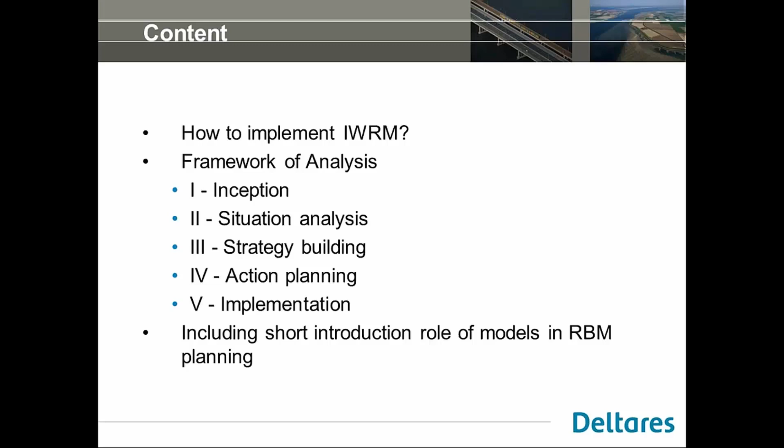To recapture IWRM, what is it? It's a big word. It was already established in 2000 by the Global Water Partnership, and IWRM is a process. It's not a goal, it's a process that stimulates or promotes coordinated development and management of water, land, and related resources in an integrated way, and it should benefit economic and social welfare and promote sustainability of ecosystems. It's also based on 4 principles, which we call the Dublin principles because they were discussed in Dublin. One of the principles, for example, is a participatory approach, so there is definitely a place for stakeholders to be involved. They should be involved to make a good IWRM plan.

But how do you implement IWRM? There was a report from the Global Water Partnership in 2009. It gives you a kind of handbook for implementing IWRM in basins, because river basins seem to be the most appropriate spatial level to implement IWRM.

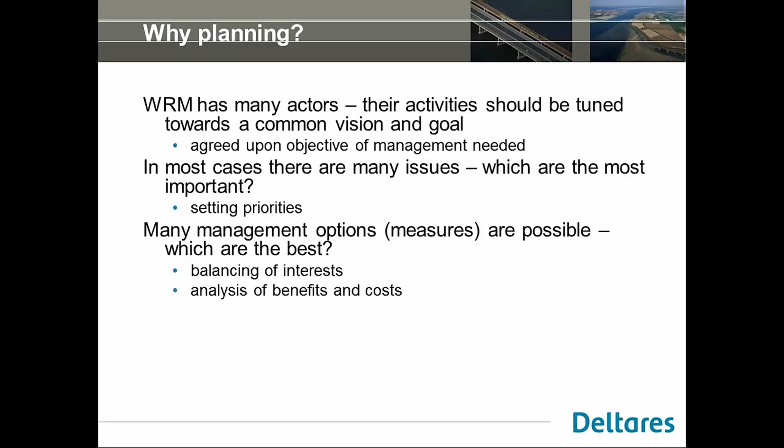And if we want to have an effective plan, we also have to make sure what has to be done and who will be responsible. Who will take up the action? Who will take care? Who should give a permit? Who has to do the actual implementation in the field work, and so on. So we have to be clear about roles and responsibilities.

And we want to assess the risks that are involved with this plan, so we also have to make a risk assessment. And so all these items make that we want to plan ahead, so we want to come up with an IWRM plan.

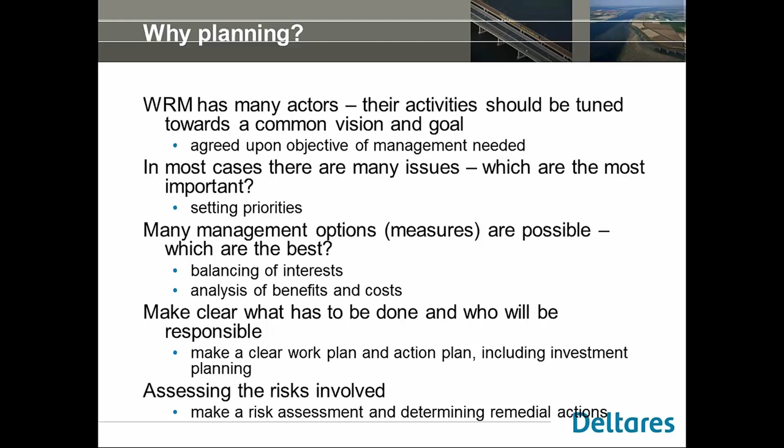A typical planning cycle that was already presented by the Global Water Partnership looks like this. Most of it starts with a vision: where do we want to go ahead? We identify the problem, what is going on now, what is the situation now, and how are we going to improve it, like a strategy. We make a plan, we implement it, we evaluate it. Are we proceeding? Is it going to be better according to our vision, where we want to go? And we go ahead.

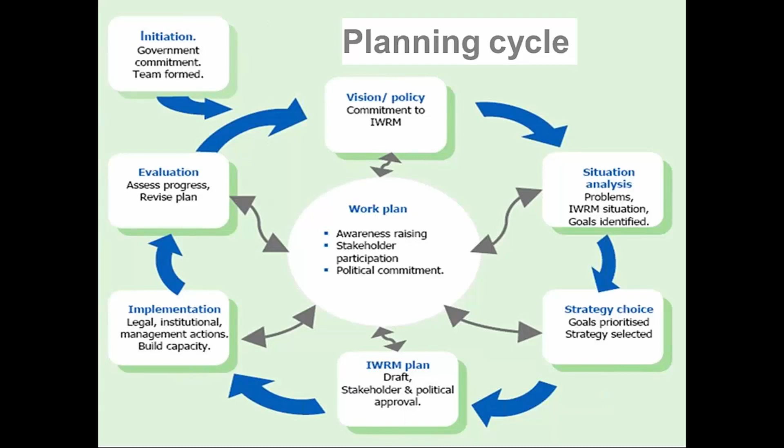What we did in the project for the World Bank, Deltares, Global Water Partnership and IHE, is we made a framework or planning guidelines for the Philippines, on how to implement IWRM in the Philippines on the river basin level. We made a manual showing all the steps to go through to come up with an effective IWRM plan.

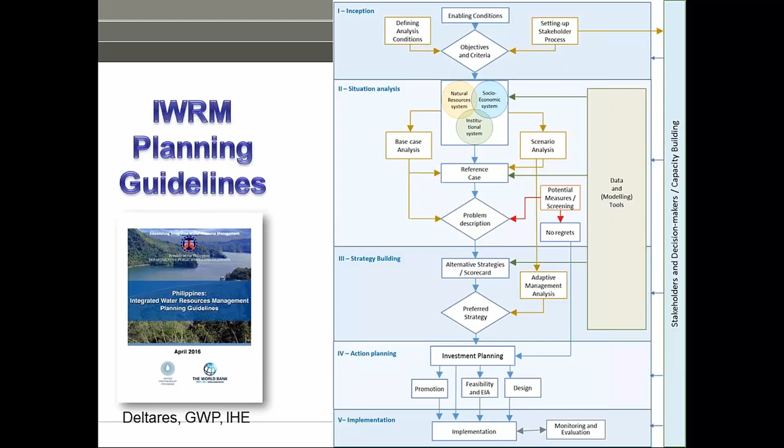The framework looks like this, and today I will guide you through this framework. It consists of 5 main phases. The first phase is the inception phase. It's the starting up of the project, and it sets the boundary conditions for the analysis.

The second phase is the situation analysis: what is happening now, and what is happening in the future if we don't do anything. The next phase is strategy building: what measures can we take to address and improve the situation in the water resources management system? The last 2 phases are the action planning and implementation, where we prepare the investments and start implementing these measures.

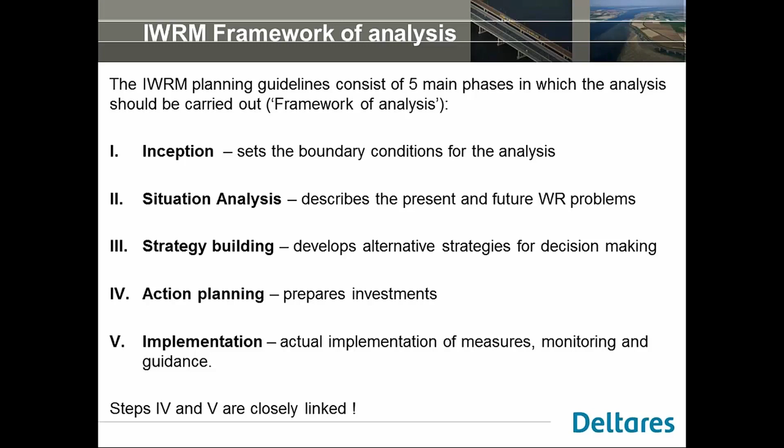It's not that if we just do these 5 phases, then we are done. No, you have to realize that it's an iterative process, a cycling process. So after you finish your IWRM plan, a next phase will start and you can focus more on a special area or a special problem, or get other people involved, and so on.

It's a cycle process, and every time you proceed more. For example, in the Netherlands, we have this Dutch Delta program. We had the first phase, it took 5 years, and now we are in the second phase that again takes 5 years. And we start all over again, but now we are focusing more on hotspot areas in the Netherlands.

It is important also to get the stakeholders involved and to end every stage of the project, of every phase, with a decision making or agreement upon between the stakeholders. So every phase, the stakeholders in the beginning of that phase, we start creating common level of knowledge so everybody knows what's going on and has the same information. Some stakeholders have a lot of information about their own situation, but not from the other stakeholders.

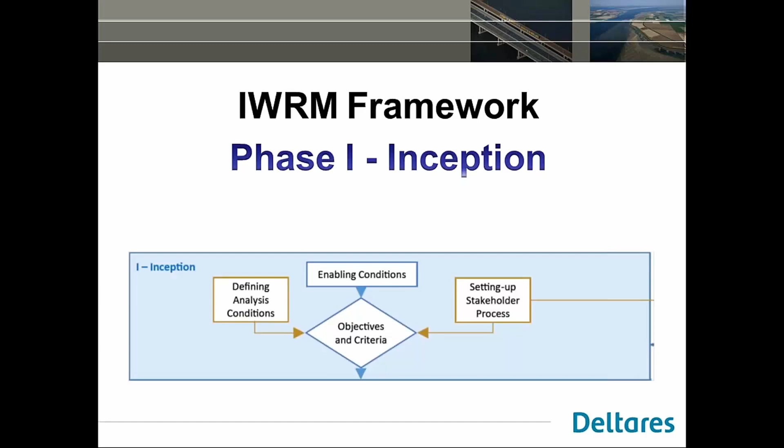So when I'm thinking about creating enabling conditions, step 1 is what I said - it should be embedded in the institutional framework of the country or the river basin. And you have to have management instruments like data and tools to make this plan.

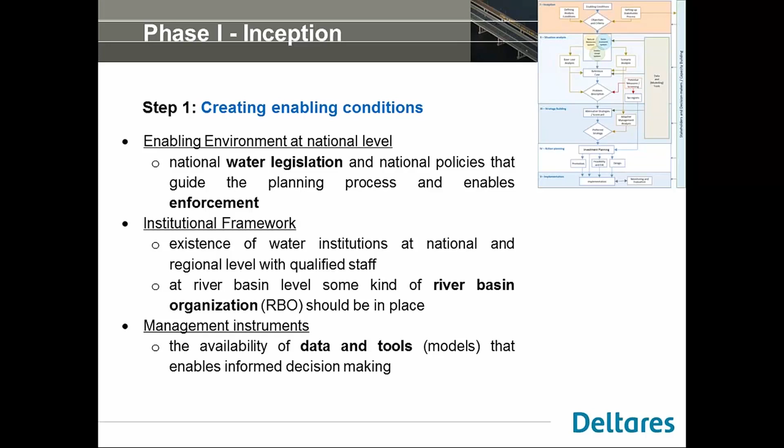The stakeholder process is also important. So who should be involved? So it starts with stakeholder analysis. What are the representatives? Which are the governmental organizations that are involved? Are the NGOs involved? Who are the stakeholders? Is the private sector, and in what way do we want to involve them?

Should they be involved like by presentations? Or are we going to discuss and build up the models? Or are we going to outsource research? Or is it just discussing? There are different ways to involve these people.

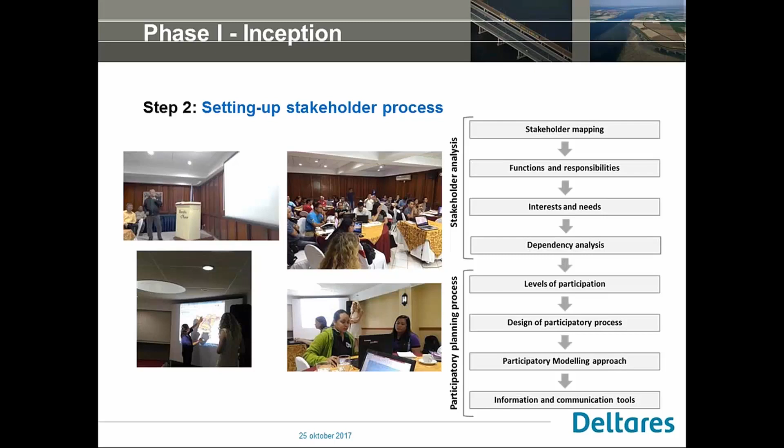And we have to be clear about what are we going to look at. Is the planning ahead for 5 years? Is it for 20 years or 50 years? In the Netherlands, for example, we look at 2050, 2100 - that's far ahead. But you can imagine, for example, in Bangladesh or in the Philippines, it's no use to look ahead for 2100 if you're studying climate change, for example, it is. But nowadays, there are already big issues, so you plan ahead for more like 20 years or so, because there's also major change going on in the countries.

And you also have to be clear about economic analysis. You have to be clear about certain assumptions like discount rate and so on. So you have to specify these. And you also have to be really clear about system boundaries.

Are we going to take the coastal zone also into consideration, or do we only focus on the river basin? Are we going to the neighboring country, like for example for the Ganges? Are we also taking into account Bangladesh and India, or only Bangladesh? So we have to worry about this, and how are we going to present our results?

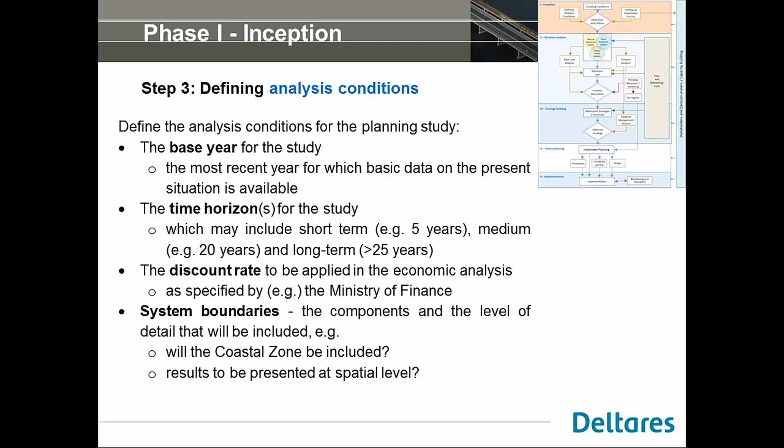One of the most important steps in this inception phase is also defining your objectives. So what are you going to reach for? And normally it's based on national objectives. So what is the national policy? And it's not only related to water resources management, it also interacts with other policies in the country. But how to judge them, we have to make them operational in water management terms.

So what can we do from a water management point of view to address these topics in the country? And when are we satisfied? So what are we targeting for? And how can we monitor that we reach these targets?

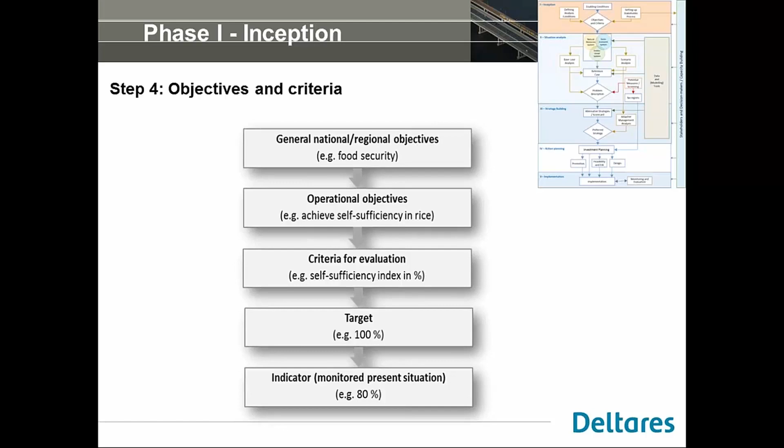And in the end, we want to come up with a scorecard. So when will we think it's perfect? That's in the right column. And how far are we now, and how far after? If we don't do anything, what will happen then? How are we going to accomplish this?

For example, in the Sustainable Development Goals, we say, okay, we want to implement IWRM. It's now between 0 and 100% as the target, but when do we reach the 100%, and how are we going to target that we now, for example, reach 80% or so?

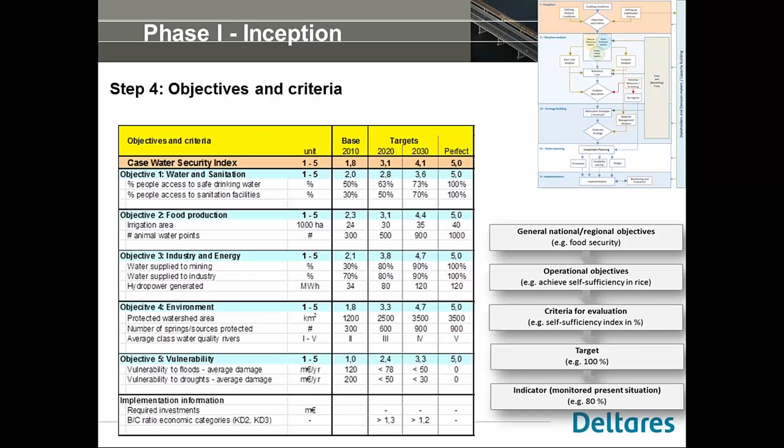For an example about these objectives, the objective of the Netherlands - I showed you a picture about flooding in the Netherlands - and for the Netherlands, the primary objective, most important, is safety. So if we get flooded, then the Netherlands has a big problem. So it's more important than fresh water supply, for example. We think our water system is mainly designed for managing this flooding issue.

Secondary, so it's also important but less important when we make decisions and set priorities, is drinking water supply and also supply for agricultural use or navigation. But we also think it should be fitted into an ecological system. So it's quite expensive. We have, for example, this project, Room for the River, that we want to implement, and we want to safeguard the country from flooding, but we also want to take into account the ecological consequences.

So we give priority to measures that also benefit that goal. And it's different for each water resources IWRM planning study, but if you look at the different goals in different countries, you see some similarities.

And mainly IWRM is really focusing on developing water resources in a way that we get maximum benefits from it, both in a social way and in an economic way. So it's not only about the water system itself, but it should in the end benefit equity, income, and so on, and also the environmental conditions. But it's also limited, of course, by the budget that we have. So we can only spend it once, so we also have to take that into account.

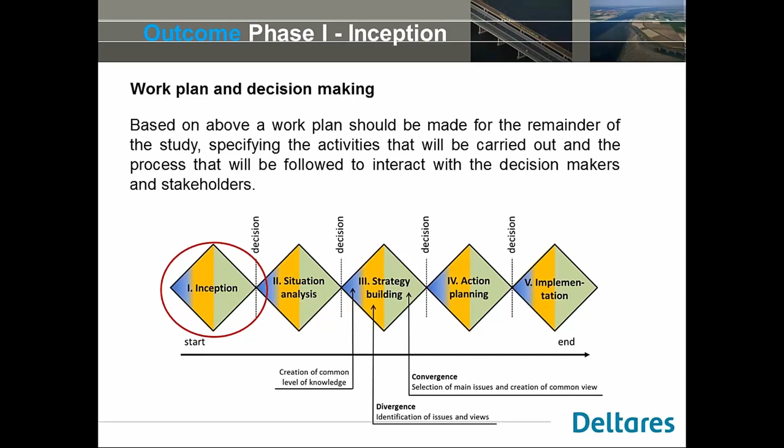Then at the end of the first phase, we have a view about what the IWRM plan should be about and what we want to accomplish. So based on this, we can make a work plan, how to proceed and do the next 4 steps. Okay, then I will go quickly through the 4 steps. The first step is the situation analysis.

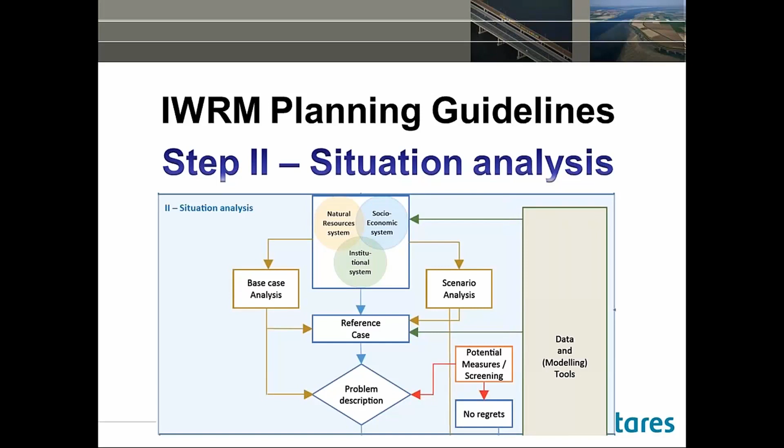We describe the water resources system. For integrated water resource management, it's important to have the natural system, so the water system and the land resources, but don't forget about the socio-economic system. So what are the sectors that need water, the water demand, and also the guidance, the regulations and the management, so the institutional system.

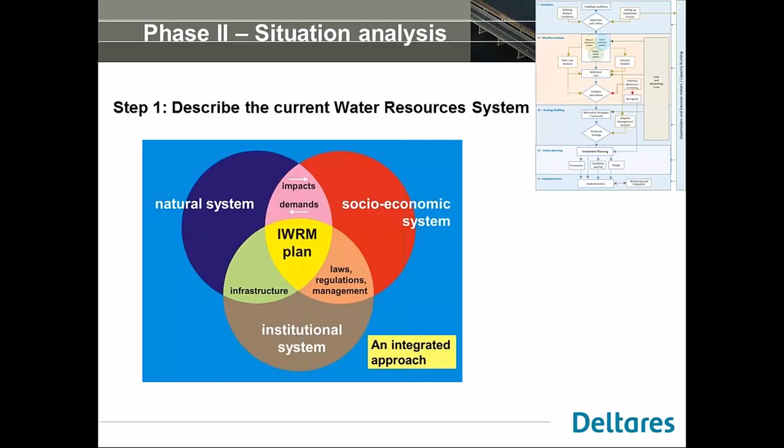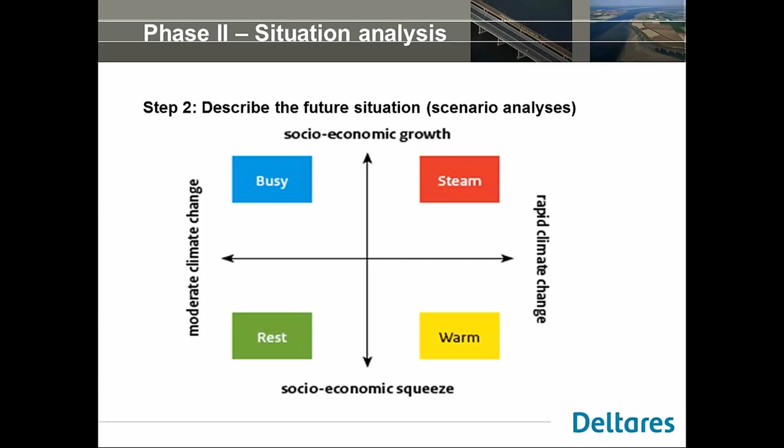We want to describe that in an integrated approach. And we don't want to show it only for the current situation, but also for the future situation. So we have to develop scenarios looking at climate change and also on economic developments.

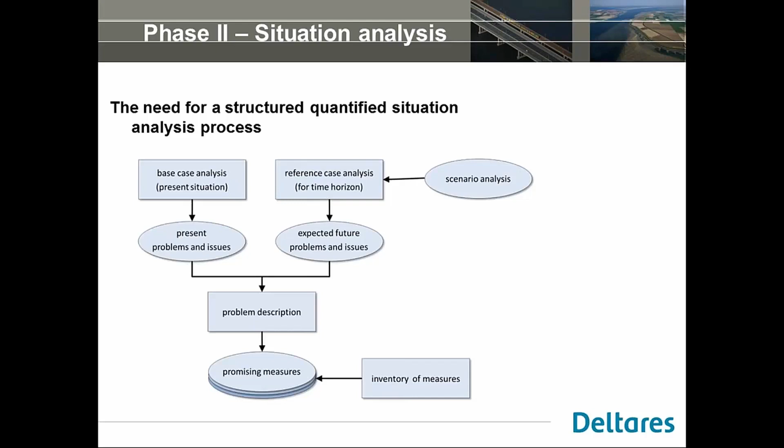So by comparing the base case, the present situation, and the future situation, we can make a description of the problem. And by making a description of the problem, we can make an inventory of measures that we can take, a long list, more or less a wish list maybe, of how we can address these.

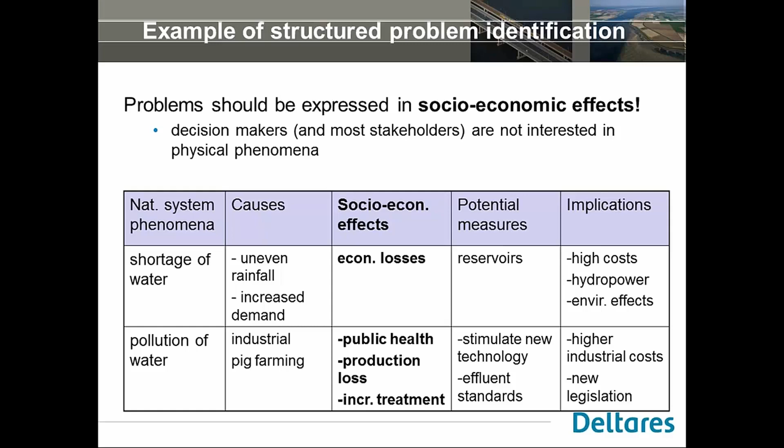We already discussed that we think the effects should be expressed in economic terms, also because decision makers are not only interested in physical phenomena, but also in economic phenomena. They want to know about food production instead of water levels, for example. So this is an example of how the problem definition can be presented.

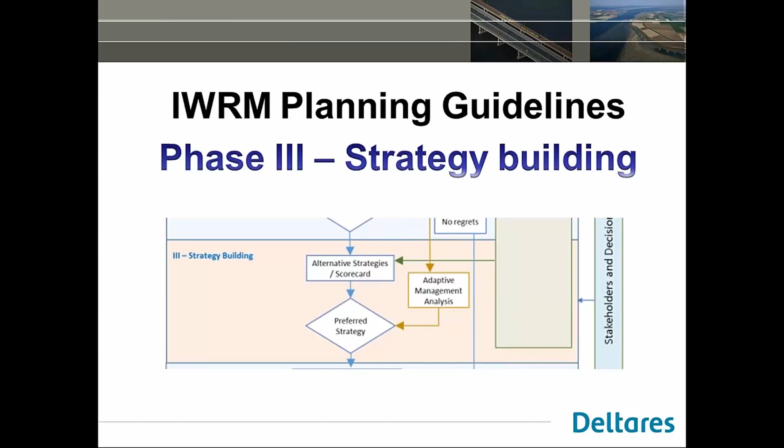And then after the situation analysis, we come up with the strategy building phase. The strategy building phase consists of 3 steps: development of alternative strategies, adaptive management analysis—so how can we adapt to the future—and then selection of the preferred strategy. This is an example of how to structure these: design different alternative strategies, judge what the impact of these strategies is, and compare them.

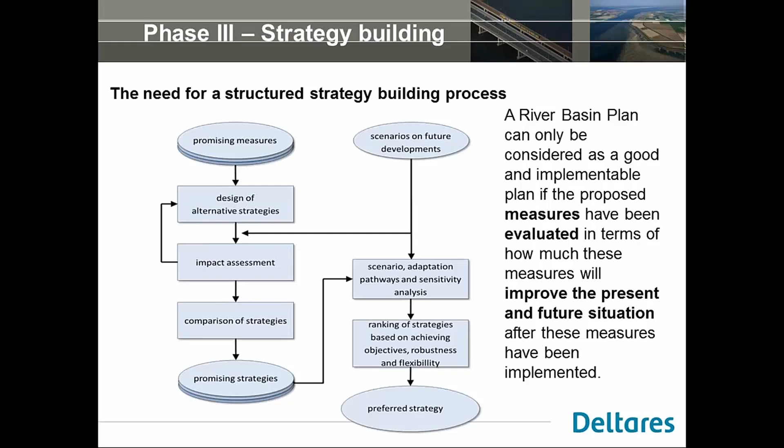For example, by comparing these alternative strategies in a scorecard, we can present it to the decision makers. It can be done in an iterative way, but also based on extensive modeling exercises. Sometimes it will be possible to express everything in cost-benefit analysis, but for example for nature it will be more difficult, and maybe it's more about a judgment for which one is the best, which one is the middle, by expert judgment.

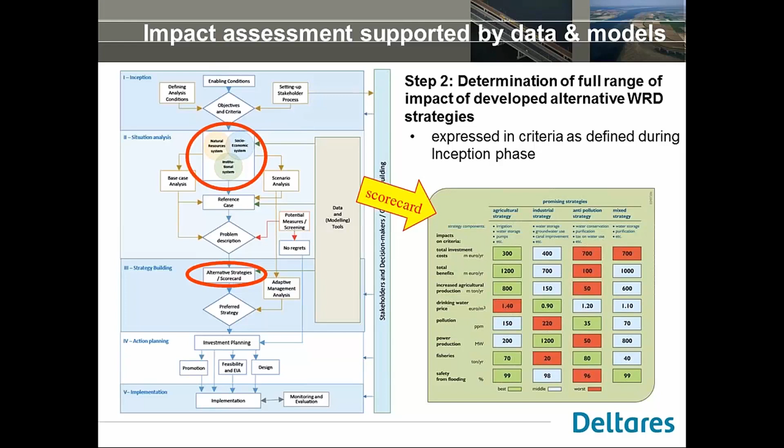This is an example of the scorecard that I presented by the problem analysis. So we now add the strategies and see what the impact is related to our target, so how are they going to improve the situation.

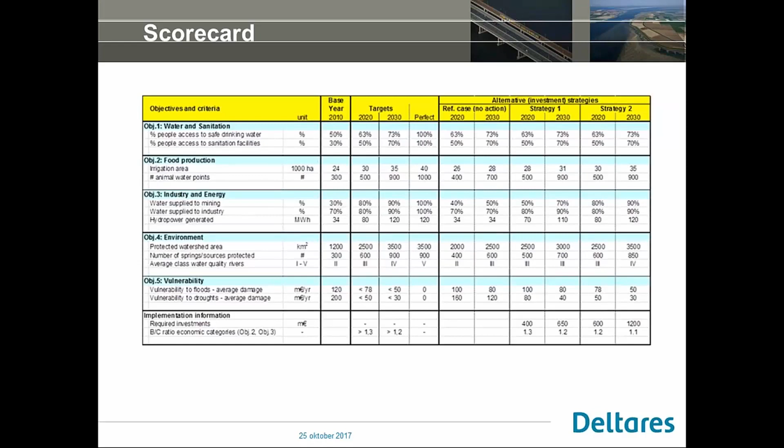And then we are at the end of the strategy building phase, and we have to select the preferred option that we are going to implement. We have to translate this preferred strategy into an action plan and come up with the implementation. One of the items in the action plan is the investment planning, and that's getting more and more attention now, as we see in the scientific world also.

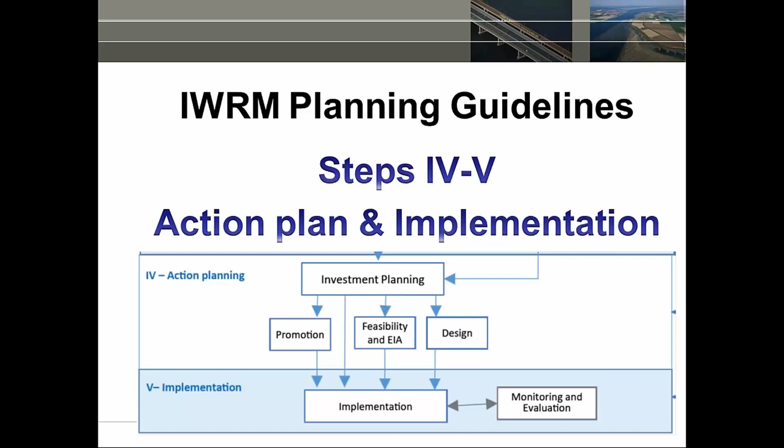It's more about financing, how to finance all these measures and take them into account as soon as possible to make really an effective plan. So that we are clear about what we are going to do, who is going to do it, how are we going to do it, when, and where is the money coming from. Otherwise we have a nice plan, but it will end up on the shelf.

Now, for the investment planning, it's important to take into consideration the governance mode. What kind of type of good is it? Is it public? Is it private? For example, if we need water for a wetland, is that private? Should it be from the private sector? Are people going to pay to visit the wetland, or can everybody go there? So is it a common good because it also protects us from safety, for example from the typhoon? So it can be also a common good.

We have to take it into account to define our level of services. So what is it going to do now? What will be the level of service, for example, for water supply? And we have to come up with the financing and the procurement strategy. So what is the financing behind that measure?

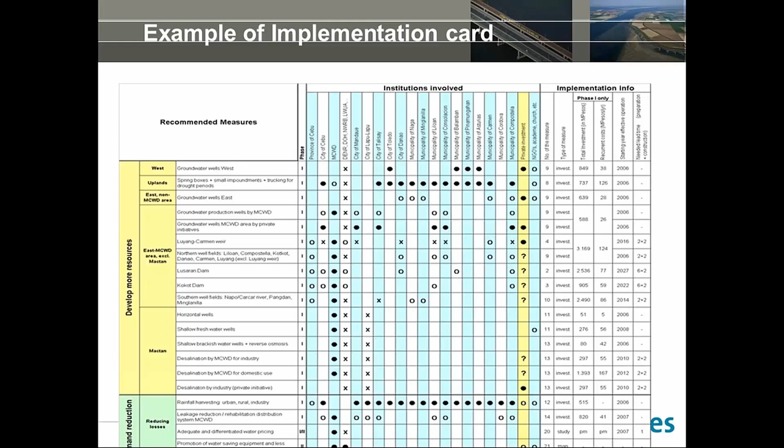Last, an example of the implementation card, to make really clear which institutions will be involved and what will be their role. This is an example of Cebu in the Philippines that we made. We spelled out which organization should take the initiative, who is providing permits, who is really implementing it. Is it an investment or public awareness? Is it green infrastructure or gray infrastructure? What will be the cost and where is it implemented? This can help to get an overview and present it to decision makers.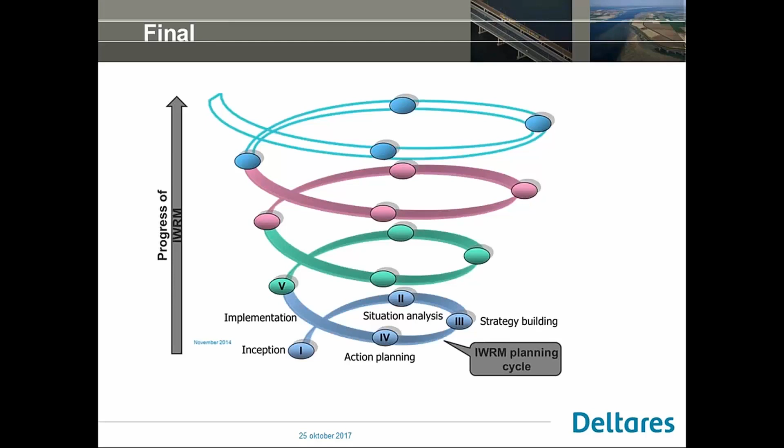In the end, the outcome of this phase is this action plan and implementation, and that should be monitored. So we also have to put it in place organizationally, for example by a technical secretariat that monitors and evaluates the progress, and if necessary steers ahead and improves the action plan, or maybe we go up again and start making a new plan or update the plan. What I want to stress here at the end is that it's a circular process, continuously improving, and it's the same - not only for the plan, but also for the framework. We have to adjust and improve it for the next step.

Then I came to the end of my presentation. So are there any questions still? Because it's already late, I understood. So, okay, one or two questions.

A lot of information. In the Netherlands, a question, or maybe abroad, for the webinar? No. Okay, then I have a question. No.

If you look at the different phases, I think there's a lot of time needed to come to all the phases. Which is the most difficult part, or the longest part? Most time consuming. And what can you do about it to speed it up?

I think what you see is the inception phase, to get agreement about what are the issues that are addressed, because in the beginning everybody is looking from their own point of view, and I think it takes time to grow together and to get real commitment to make this plan. You don't know beforehand what comes out of it and if it will benefit your own sector. So in the beginning, everybody should agree upon how to proceed, and if the steps are clear, then you can go ahead, and everybody will accept what comes out of the plan, if they are taken by hand. It shouldn't be a surprise.

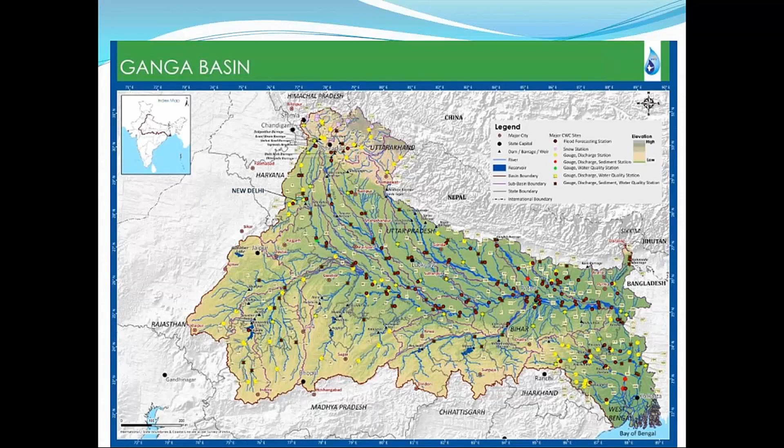This is nice, and it works. It's huge - 860,000 square kilometers. Let's compare: the Netherlands is 40,000 square kilometers, so it's about 20 times the Netherlands. There are 11 states included, so because water management is dealt with at the state level, that requires a lot of coordination. Furthermore, there are 450 million people living in the Ganga basin, and that's also a lot. I've never worked in such a huge basin as the Ganga basin.

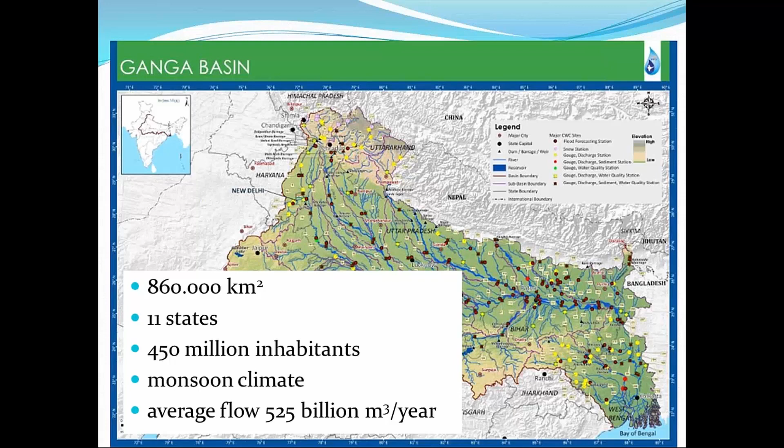The average flow is 525 billion cubic meters per year. If you compare, for the Nile that is about just a bit more than 10% of that. If you divide the average flow by the number of inhabitants, you're around 1,000 cubic meters per capita per year, which is more or less the boundary for water stress. So that's already showing that in the current situation there is already some water shortage, especially in years with El Nino induced droughts. There is already experienced shortage in the system, mostly in agriculture. But the expectation is that will increase a lot in the future due to population growth and economic growth, which results in an increase of per capita water demand.

The issues are not only on water quantity, but very much also on water quality and ecology. Because a lot of water is taken out of the system, the rivers in the dry season become nearly dry and nearly completely filled with wastewater. India has a monsoonal climate with nearly all precipitation falling in 2 months, and the rest of the year is very dry. There is not so much storage in the basin at the moment. So during the wet season, all gates are opened and the rivers are flushing. The other 9-10 months of the year, all gates are closed and there's hardly any flow in the main stem of the upper part of the Ganga.

In this eastern part, there's much more water coming in, mainly from the Himalayas. So that results in water quality problems, of course also caused by a lack of wastewater treatment capacity, but also ecological problems directly due to the water quality problems, but also related to the low flow, related to the loss of habitats for species, because the connections are lost along the river due to dams and gates, but also between the river and its floodplains.

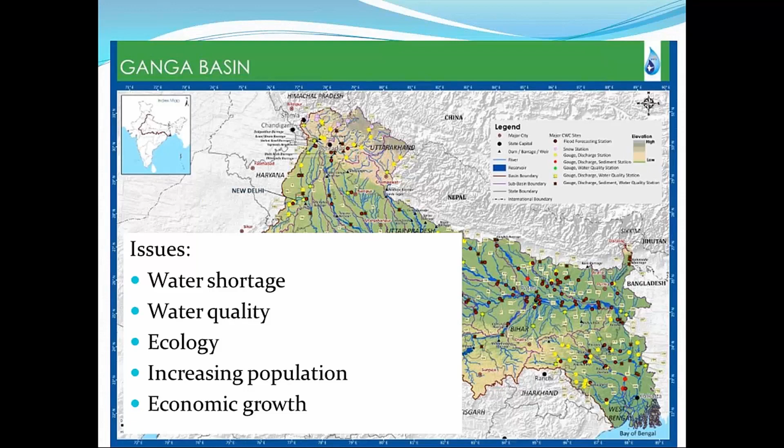The objectives of our study were fourfold, and the one we deal with today is mainly on accessible information and knowledge. That's where the computational framework is important, but it's also related to the other three. The multi-stakeholder process - we very much included that into our model building by trying to be as collaborative as possible. The final aim of the project is to define some plausible scenarios - not a plan, but some future possibilities that could form the basis for further decision making by the government of India and the different actors. And finally, to strengthen the capability of the different players to do strategic planning in the basin.

The aim of the model, the computational framework within this whole setting, is to support decision making with respect to strategic basin planning. For this huge basin, it's impossible to make one model which includes all details. So for strategic basin planning, strategic decisions, it has to be able to describe the impact of measures at basin level, but not detailed at local level.

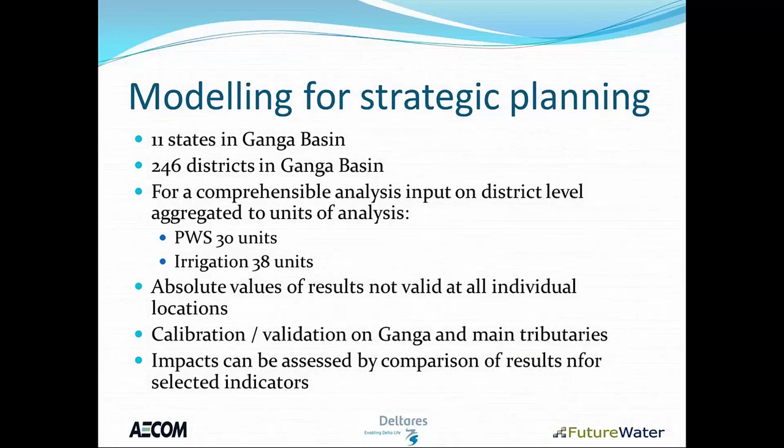Those calculate the discharges at different locations. The groundwater model describes, first of all, the groundwater levels based on recharge and on the abstraction rates. But it's also very important that they describe the interaction between the river and the groundwater.

So how much water flows from the groundwater to the river, and how much water flows back from the river to the groundwater. RIBASIM takes care of all the water demands, the water allocation between the different demands, between the different users, and it calculates the water demand, which feeds into the groundwater model.

Then connected to RIBASIM is a water quality model, which describes the different concentrations of pollutants based on a database of emitters. And finally, an ecological module which uses expert rules, knowledge rules, based on the output of all the models, to derive a qualitative or semi-quantitative measure for the ecological state for different indicators of the river. So that could be the ability of the ecosystem to support the Ganga dolphin.

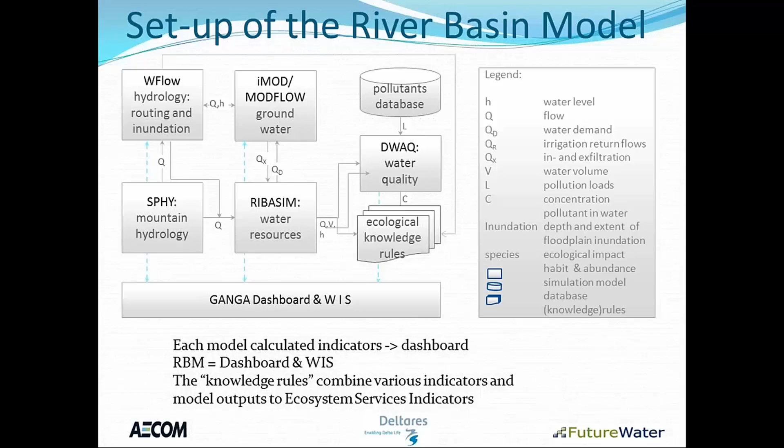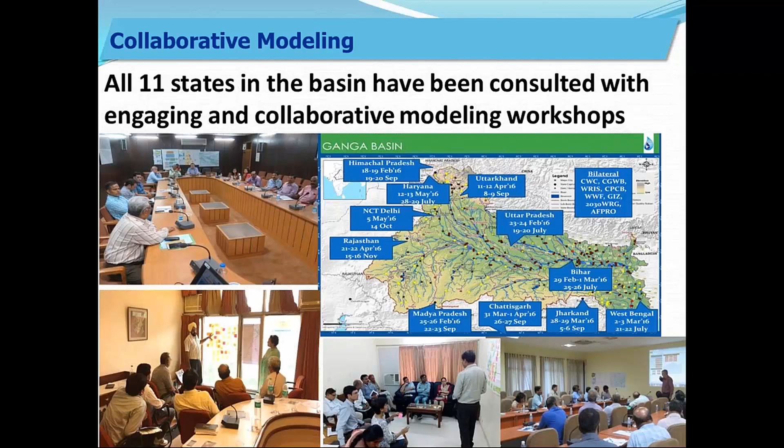Collaborative modeling was very important. We have so far, I think, nearly finished the third round of sessions in all of the 11 states to collect input in the first step, especially regarding what is important, how does the system function, those kind of causal relations, but also what interventions do you think are reasonable so that we could make strategies, and which indicators are important. And then you see that for different states, different indicators are important.

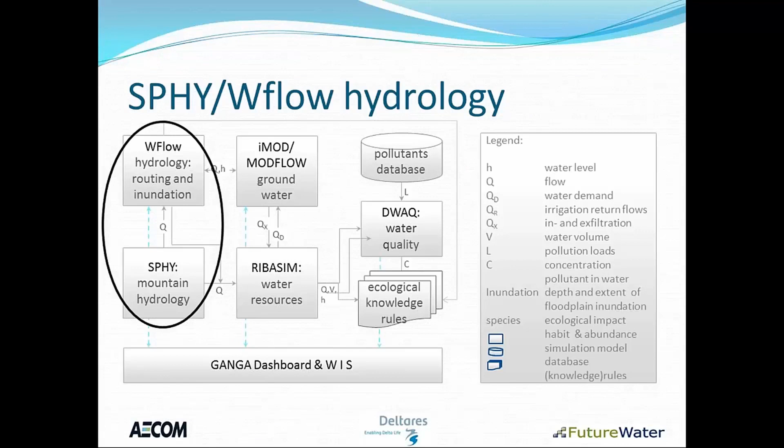Now, I will briefly introduce to you the different components of the computational framework with some emphasis on RibaSim. We've chosen to use two different models for the hydrology: the WFlow model, which is Deltares' generic hydrological modeling framework, where we did not include the groundwater part, because that's dealt with in IMOD, the groundwater model that we included.

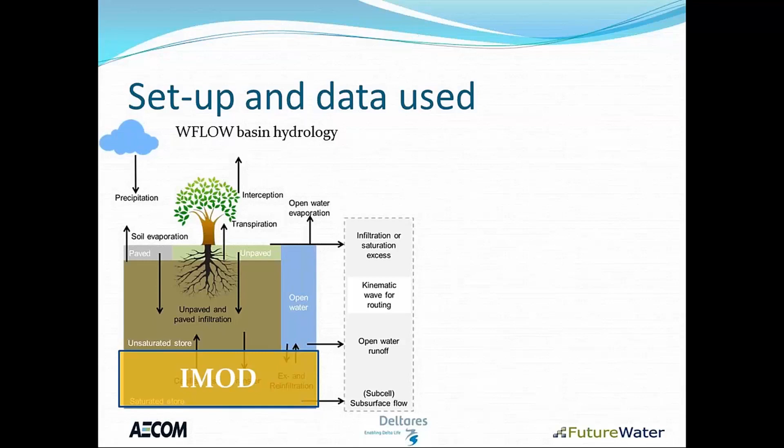And with WFlow, we modeled most of the basin, except for the part where we used SPHY. SPHY is a model developed by FutureWater, and it's especially good at modeling glacier hydrology. So it includes much more than WFlow, the processes of glacier melt, snow melt, glacier accumulation, etc.

And those are important in the upstream part of the Ganga. Although they are a bit less important than I initially expected, it appears that the Indus is much more dependent on glacier melt than the Ganga, if you look into the impact of future scenarios.

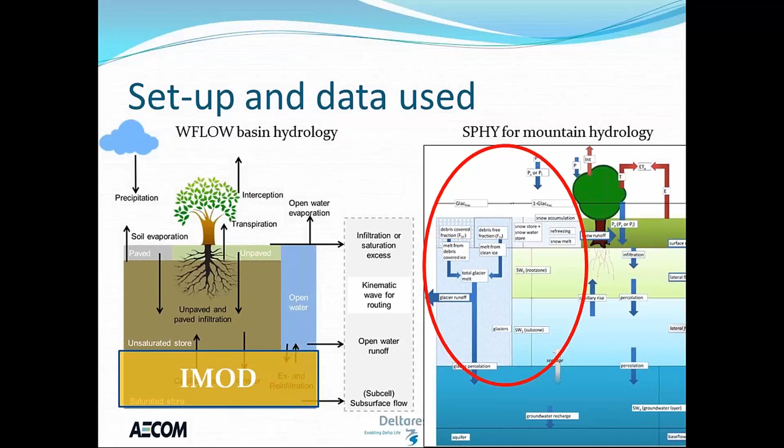Both models are completely, fully distributed models that work on a 1 by 1 kilometer grid in this case, and we used mostly input from global data sets, but where available, we replaced those by local data sets. For instance, the precipitation and temperature were provided by the Indian Meteorological Department for India, but for the part outside India we used global data sets like WFDEI.

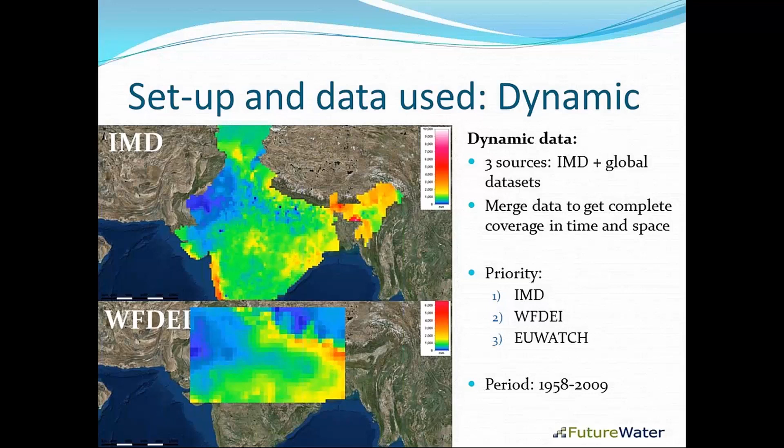To the status of the models, maybe it's good to add that this modeling part is finished. We are still in the process of finalizing the whole system, and the next step, the groundwater step, is still under construction, so I cannot go into so much detail here.

Again, a fully spatially distributed model. It is prepared in IMOD, which is Deltares' version and graphical interface around the well-known USGS ModFlow model.

It's a large model, with a large number of computational cells, over 1 million, with a time step of 1 month so that we can calculate longer periods. That's the same time step we used in RIBASIM. It's a very large time step if you look at flooding, for instance, but for water allocation, a time step of 1 month or 10 days is more or less the time step with which you divide the water over the different users. That's why we selected this time step, and it allows calculations for longer time series.

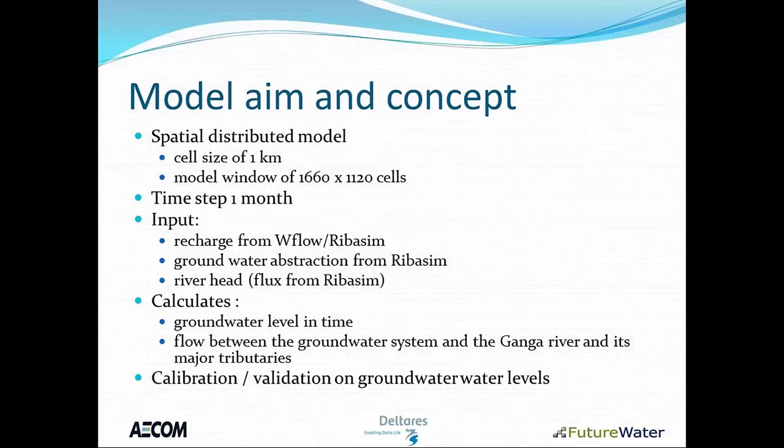The model boundary is different for the groundwater model than for the hydrological model, because groundwater is not important in the whole area, only in the alluvial. But if I say only, you see that's most of the catchment. Within the mountainous areas to the south and the north, the groundwater flow and groundwater storage are of limited importance.

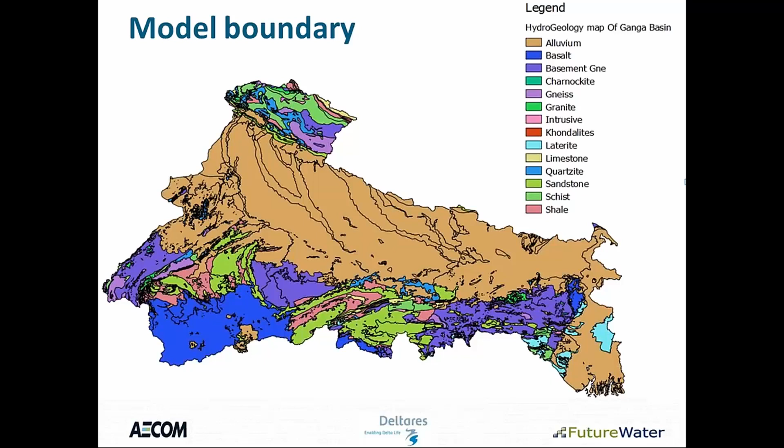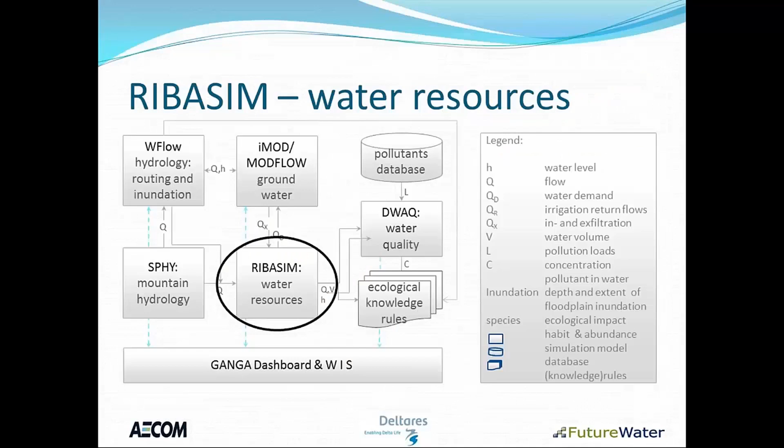Then to the RIBASIM model. RIBASIM schematizes this whole grid of 1 by 1 kilometer cells into a network of links and nodes, and we will hear more about this later today. The input of water to RIBASIM is what has been calculated by the hydrological models, WFlow and SPHY.

RIBASIM then adds to that the calculation, at every time step, of the water demand for the different users, and the allocation of water if there is a shortage, based on priorities that we have defined. A calibration took place based on flows, but also on the amount of water that was allocated to the different users.

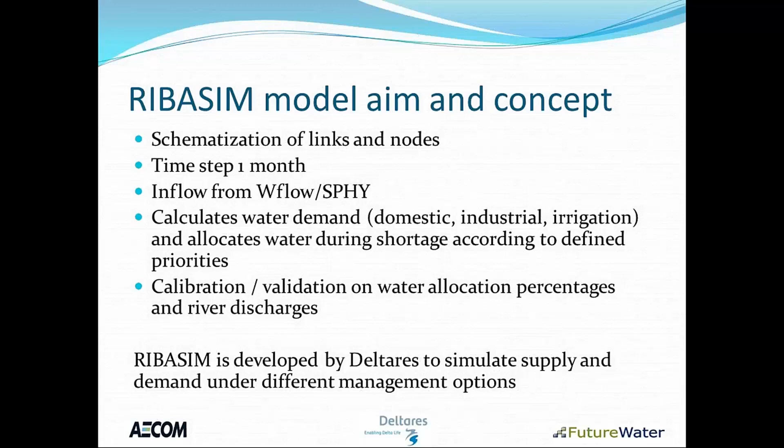The input data were mostly local. A lot of them were statistical data at district level, like the amount of irrigated area and the different crops grown in each district. However, there were 283 districts, if I remember correctly, which is a bit too much to keep an overview as a modeler, or especially as a decision maker. So we aggregated that into 38 irrigation areas, which is sufficient to describe the strategic implications on the basin level, but not enough to look at one specific irrigation area or district and focus on what's happening there. That would require more detailed modeling.

And of course a lot of other, mostly local, data sources, and very importantly, the Water Resources Information System of India, which has been set up by the Central Water Commission, providing a lot of information about reservoirs, capacities, etc.

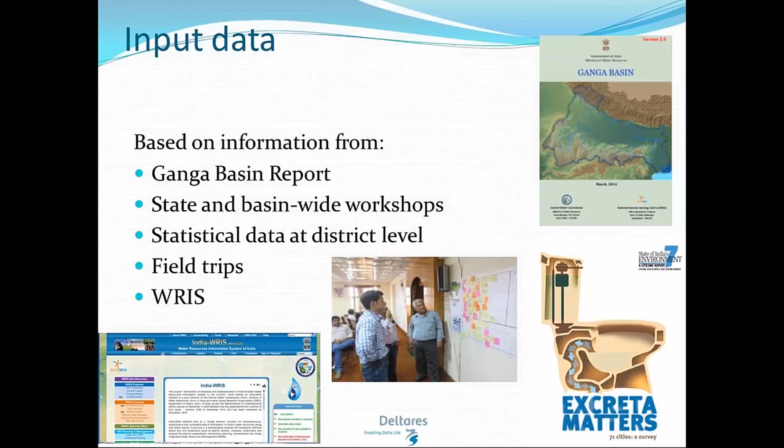The schematization consists of what we call variable inflow nodes, where the outcome of the hydrological models flows into the Ribasim model; reservoirs, where water is stored; barrages, where water is diverted; water demand nodes that are linked to both groundwater and surface water to describe the conjunctive use; and public water supply nodes that describe urban, rural, and industrial water demand.

Those have been proposed for 20 years in different versions and discussed within India. So it's important to assess their impact on the water flows, but also on the water quality and the ecology. An important part of the whole system is the efficiency of irrigation water use and what happens with the water that is not used by the plant, that's not transpired by the plants.

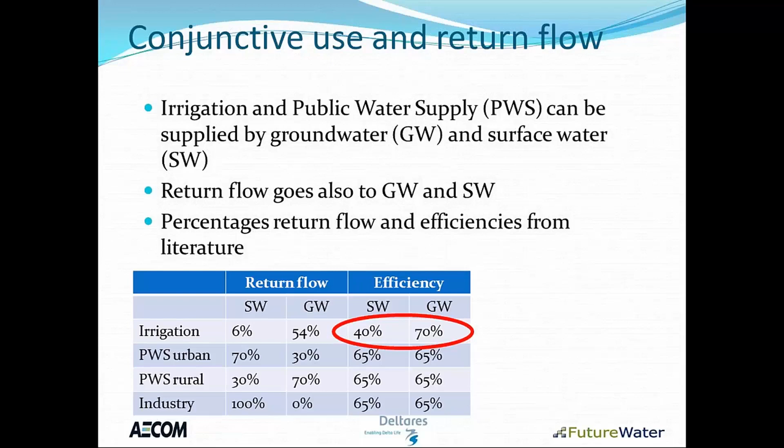But to calibrate this whole complex system, we have to bring together the results of W-flow and Ribasim, because W-flow does not describe the water management, the water use and the reservoirs. That's only done in Ribasim. But in Ribasim, very important is, of course, the water use also.

So the first assumption was that in an average year, there are currently no major shortages. And that is stated by the stakeholders. And that would mean that the demands that we calculate within Ribasim should be met. Well, that is something which we will see in how far that happens.

And furthermore, of course, we looked into other assessments of how much groundwater is abstracted, so that we do not use twice as much. And we compared simulated with measured river flows as far as possible. And the last one is important: in our model, the allocation priority is strictly that domestic comes before industrial, comes before irrigation. But of course, as nearly always, by far the largest part, around 80%, is in irrigation.

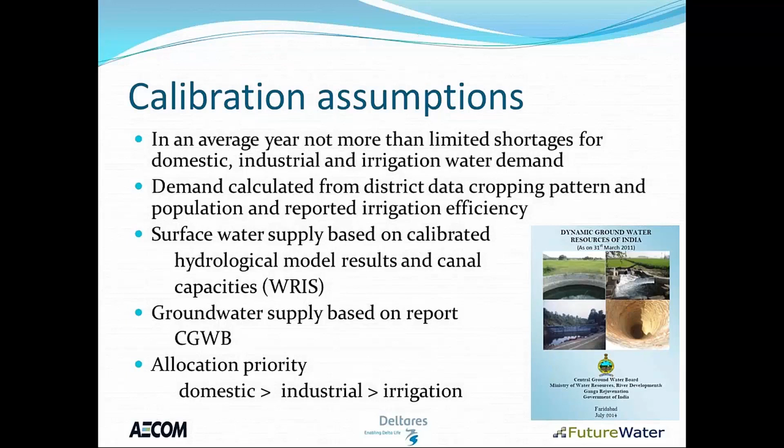Now first, the comparison between simulated and reported, assessed by others, by the Central Groundwater Board, groundwater abstractions. In the model, those are determined by two things: the amount of capacity installed to abstract the groundwater in the model, and the water demand by irrigation. You see that this is for the public water supply, that's more or less the same. But for irrigation, we overestimate slightly the amount of water abstracted.

And this is what you see internationally in a lot of situations, that there appears to be some inconsistency between the data on reported areas of irrigated crops, and then if you calculate the water demand from that and compare that to the water that is actually supplied, in most of the situations there is more water demanded than can be supplied. And that could be that a limited amount of shortage is accepted as normal, but also it could be that the statistically reported acreages for different crops are a bit overestimated.

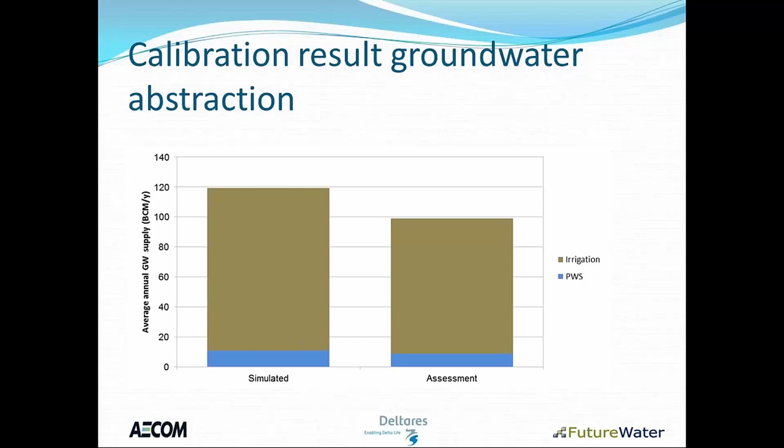And this is a comparison. I'm hoping the colors are for you visible. For me, they are not really. Comparison between simulated and observed for Varanasi, which is about halfway downstream on the Ganga. It was the most downstream location for which we had measurements. And you see that there is a huge difference seasonally, of course. It's a monsoon climate. And you see that the model describes quite well normally the seasonal fluctuation.

That is more specifically shown below. But there are also quite some differences which are relevant, but not so much that they make the use of the model impossible. The left side, by the way, is the calibration period of 14 years, and the right side is a 10 years validation period. And of course, it's important to remember with all those applications that we describe the actual state of the system with respect to water infrastructure and water demand, and only the meteorological time series is varied over this period. So especially for the 1985-1995 period, the water demand and the infrastructure would have been different.

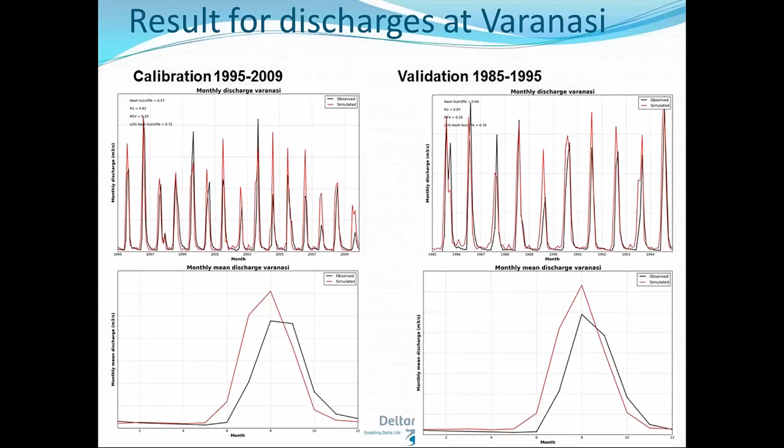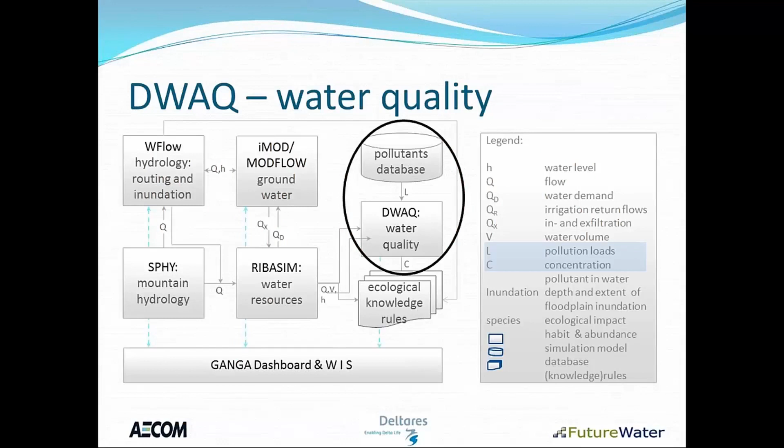Then to the water quality model, that's also still under completion. It describes the concentrations of different polluting substances, and it's important to get knowledge on what is causing the problem, but also what the interventions could do. We included agriculture as an important source, and point sources mainly wastewater treatment plants or direct emission of untreated human and industrial wastewater.

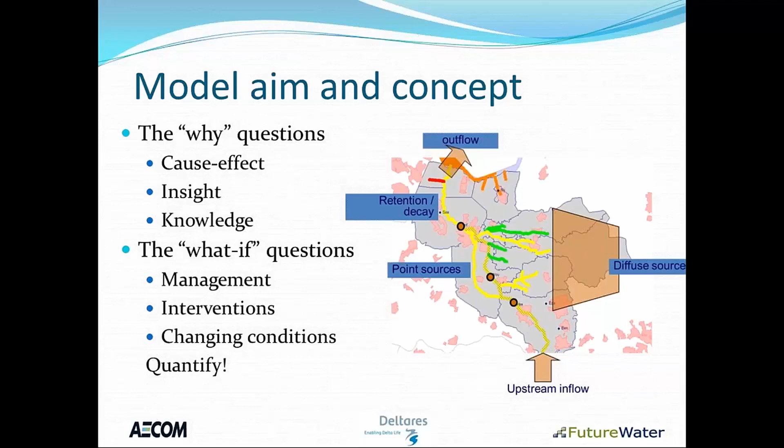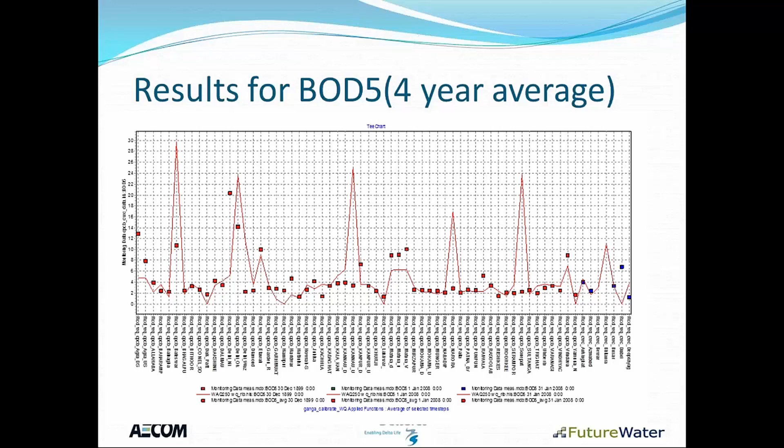We have done simulations for different substances, and that would be too much information for anyone to grasp. So luckily, there is a water quality indicator defined in India which is normally applied, based on different parameters, and we use that to combine the results of the simulations into one indicator.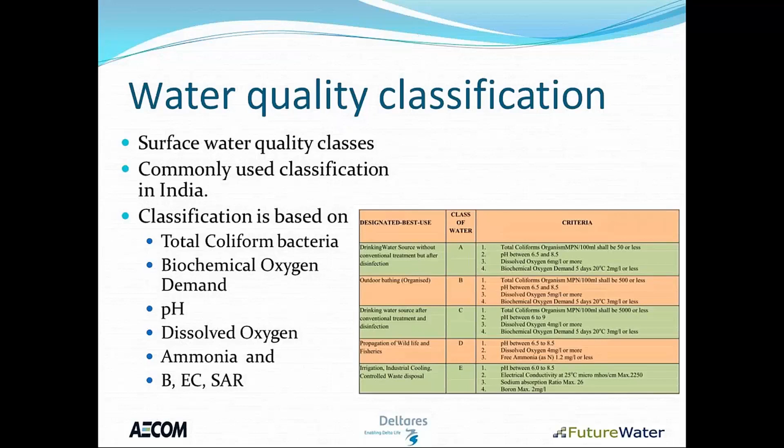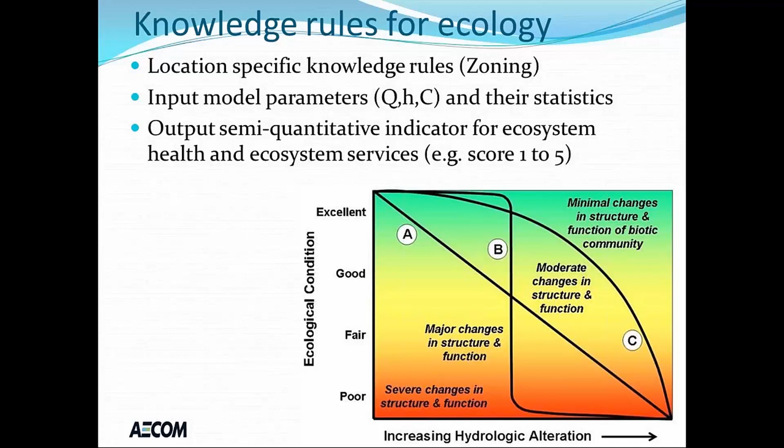Finally, the knowledge rules for the ecology - I think it was the first time we really included it explicitly in a computational framework, to try to quantify the impact on the ecology in a semi-quantitative way, because we cannot calculate how many dolphins you will have in different scenarios. But we can calculate an indicator, for instance on a range of 1 to 5, of how well the habitat suits the dolphins, based on criteria like discharge, but also related to connectivity between the river and the floodplains, between different river segments, and the results of the water quality modeling regarding different pollutants.

No results yet, unfortunately, because especially the knowledge rules are very difficult to get. The system is ready to do it, but we are still having workshops with Indian experts to derive those knowledge rules.

Then to the water information system and the dashboard. All data are stored there, all input data, all output data, and everyone has access to it. That's the common platform of knowledge that we want to create.

This is more a technical part about which software is used. It's open source, not all components of course. You can view it using Esri software, but also using open source QGIS software.

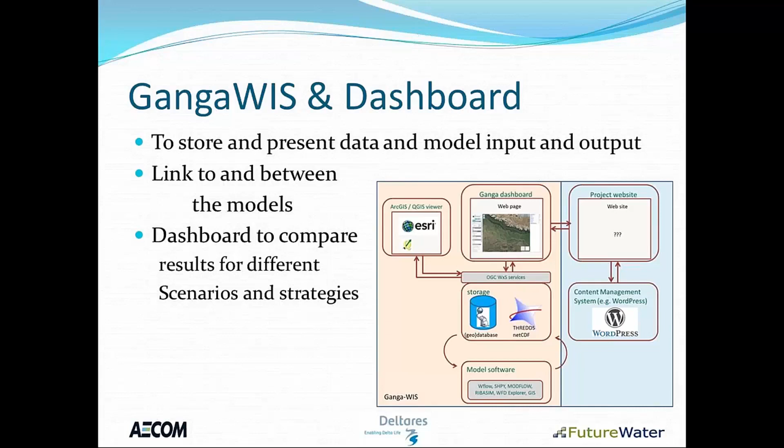Important is this dashboard where we try to present the impact of different strategies on a selected number of indicators. It looks like this, a preliminary version. You can select different geographical scopes, so the whole Ganga basin here, but you could also zoom into one state - not further, because it's not detailed enough for that.

This provides, for instance, the minimum flow along the Ganga and the water quality index, how it develops. And in this scorecard, that resembles the scorecard that Judith presented, for different indicators.

Unfortunately, in the scope of this project, socio-economy was not included, so we try to get as close as possible. So there is not the value of the agricultural production, but there is the area which has no water limitation on its agricultural production. So those are economically relevant indicators, but they are not directly a measure of welfare.

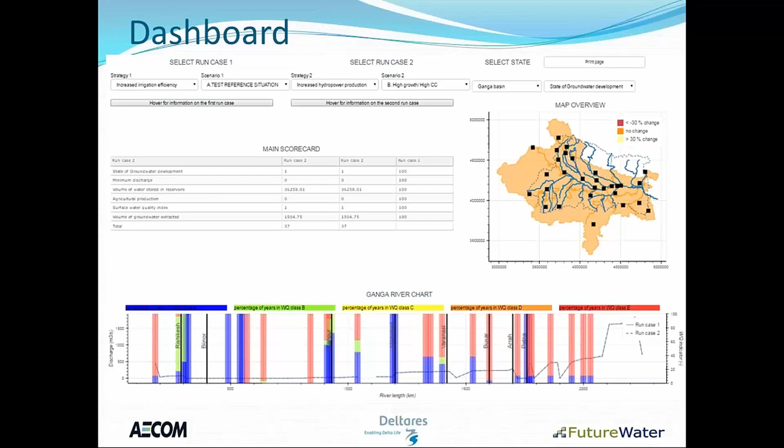Finally, the water information system, which stores all the data and which could really help to share, because in India we see that different states and different institutes have their own information systems, and it's very difficult to exchange between those. So we hope this can form a platform for exchanging information and also exchanging ideas about what types of measures to do and what their impacts are.

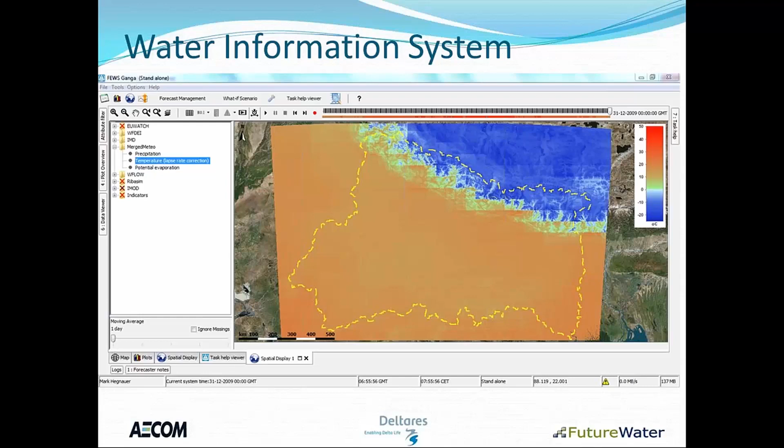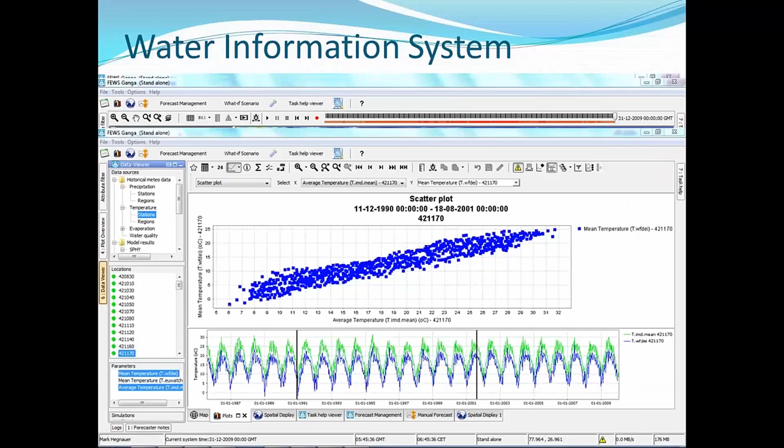Just some pictures of the types of information. Very important also, of course, time series information, where we can also do the comparison of model results with measurements, and the comparison of different strategies.

Finally, the current status. The project is not finished yet. The contract extends into 2018. The model is completed for some parts, other parts are under calibration at the moment, and the scenarios have been prepared to be evaluated with the computational framework.

Those are scenarios relating to climate change, relating to socio-economic effects, especially population growth, but also an increase in irrigated area. Different management strategies will be evaluated, looking at increased wastewater treatment, increased water use efficiency, and very important also different operation of current infrastructure, but also new infrastructure like new reservoirs and those IBTLs, the interbasin transfer links that can be evaluated with this.